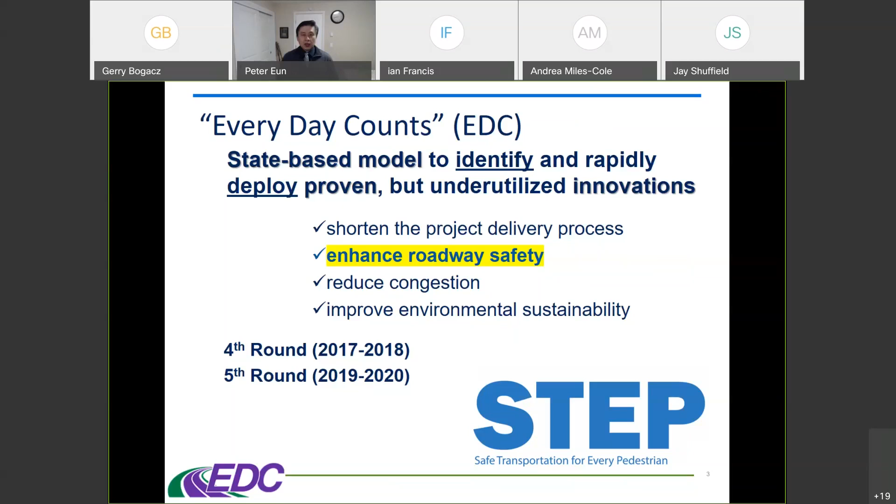There are several different categories, as you can see here, but obviously in my program, safety is number one and a priority. So let me get into STEP.

Why STEP? Well, over 72% of pedestrian fatalities occur at non-intersection locations, meaning mid-block. I suspect that if I asked everyone virtually how many hands would go up if people cross mid-block locations, even without a marked crosswalk, many hands would go up. 72% of pedestrian fatalities occur at these mid-block location crossings.

Not all of them are illegal. We think of jaywalking as being something that's illegal, but that's not always the case, and it depends. We do know that the majority of fatals and serious injuries happen when people are crossing the roadway. About 10 to maybe 12% nationally are walking-along-the-road crashes, but the majority are crossing.

So 72% are non-intersection, but roughly 27% of pedestrian fatalities occur at intersections, and about 16 to 17% of those are at uncontrolled locations, meaning no signals or stop signs.

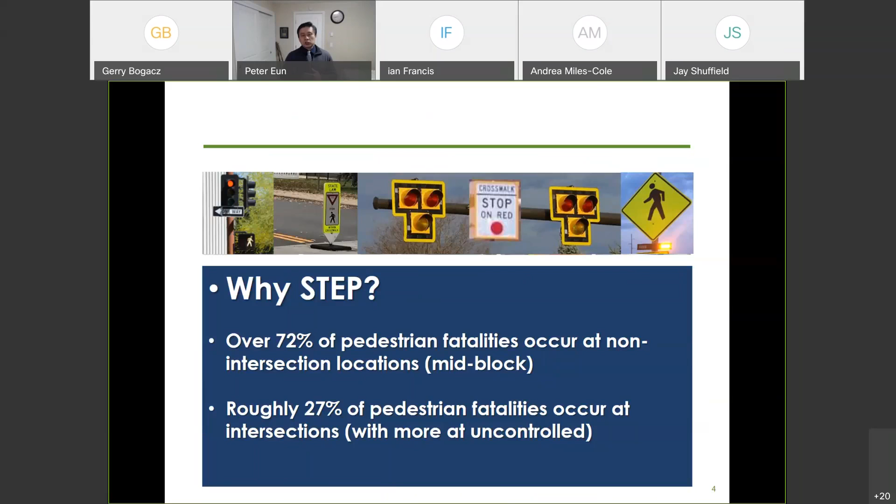Another thing before I get into the spectacular 7 is I want to talk about speed. New York is very well aware of the speed issue and how speed impacts pedestrians, but just a very quick review here with regards to the fact that the lower the speed, the less risk of death. 23 miles per hour is a 10% risk of death, while at 58, it's 90%.

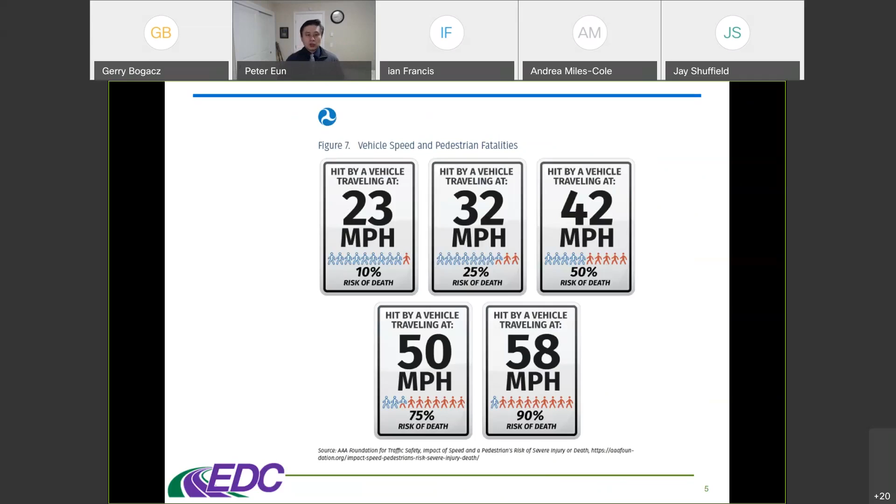And then at 42, it's 50%, that 50-50 point. So speed is something that all these treatments are going to have an effect on with regards to, and that's very important.

Now one thing, I don't know if you'll be able to hear this, if someone can let me know if you can hear the audio. What you're about to see will change your mind about speed. One vehicle traveling at a certain speed, the other at 65. Can you hear it? Yes, we can.

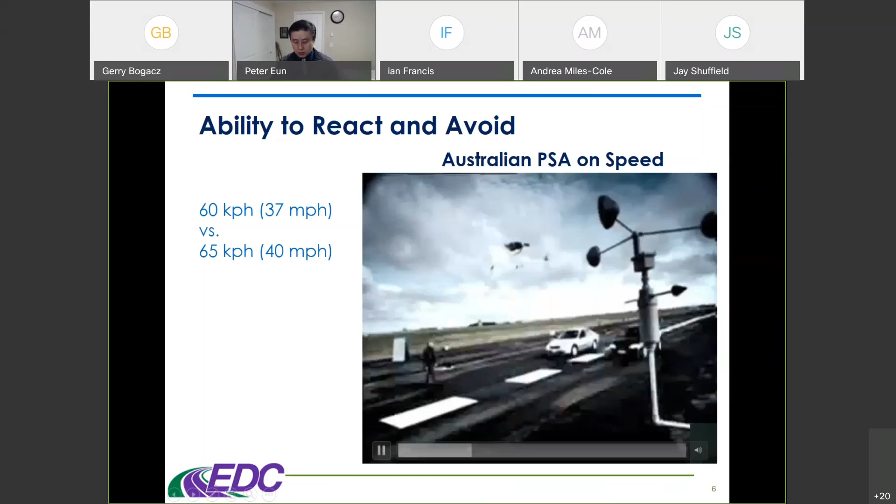Both drivers first react, and then a moment later they brake. And things start to get interesting. Out here the difference is extraordinary. In the last 5 meters of braking, wipe off half the speed. So this car is still doing 32 k's. This one also hits, but only at 5 k's. So no matter how good a driver you are, 5 k's difference up there makes 27 k's difference down here.

And imagine if this is the crosswalk with the pedestrian. So speed, it's just that 3 mile per hour difference that really makes that huge difference.

So, safe system is something that Federal Highways is going to be, you're going to hear a lot more from, and it's based upon the fact that everybody makes mistakes, there are going to be mistakes made, but we don't want those mistakes to be fatal type situations. Safe speeds is a very important part of the safe system.

And so with regards to STEP, that's going to affect that. Now, one other little bit of history before I get into the countermeasures is with regards to how this all started. There's a study back in 2005 called Safety Effects of Marked versus Unmarked Crosswalks at Uncontrolled Locations.

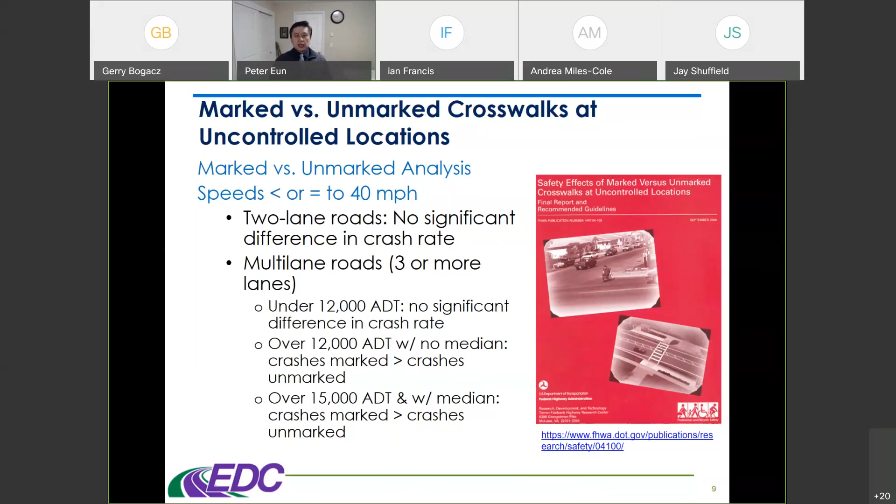So what does that mean? Should we not put marked crosswalks out there? Well, pedestrians are still going to cross at these locations because there are origins and destinations. People need to get places, and they're not going to walk miles out of their way to reach a controlled crossing. So this study said you need to do more than just a marked crosswalk.

In that 2005 study, there was a table showing the number of lanes, the ADT, and various speeds, indicating whether a location was a good candidate for a marked crosswalk or needed more treatment. The one thing it didn't include was the type of treatments to use.

What we did in 2018 was develop a guide for improving pedestrian safety at uncontrolled crossing locations, where we included the spectacular 6 different treatments matched to conditions. All of these treatments have their own sweet spot, and we helped identify where it's ideal to put in each one.

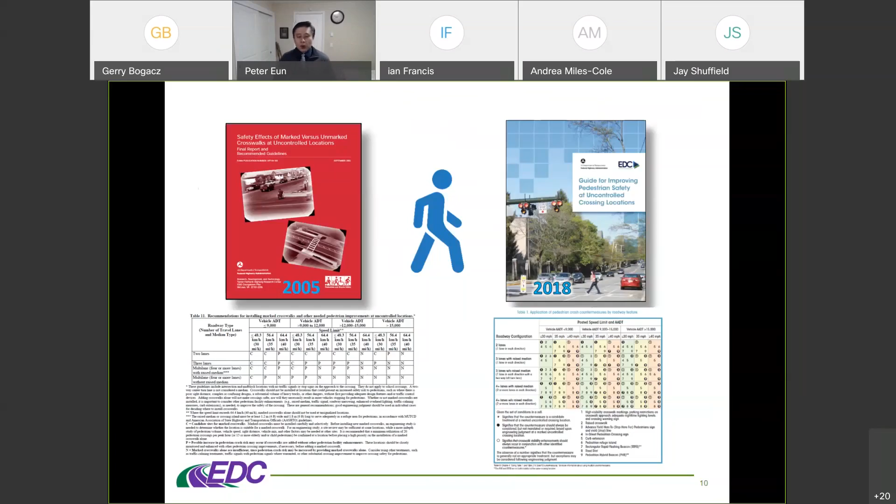Table 1 is something I'll come back to later, but let me go over the spectacular 7 — though only 6 of these are in this guide. The LPI, or leading pedestrian interval, which New York is likely very familiar with, is for signalized locations. This particular guide only deals with uncontrolled crossing locations.

Let me start with crosswalk visibility enhancement, which has a crash reduction factor of 23 to 48%. Crash reduction factors mean that if you don't currently have a treatment and you put it in, based on research reports and case studies, you can expect that range of reduction in crashes.

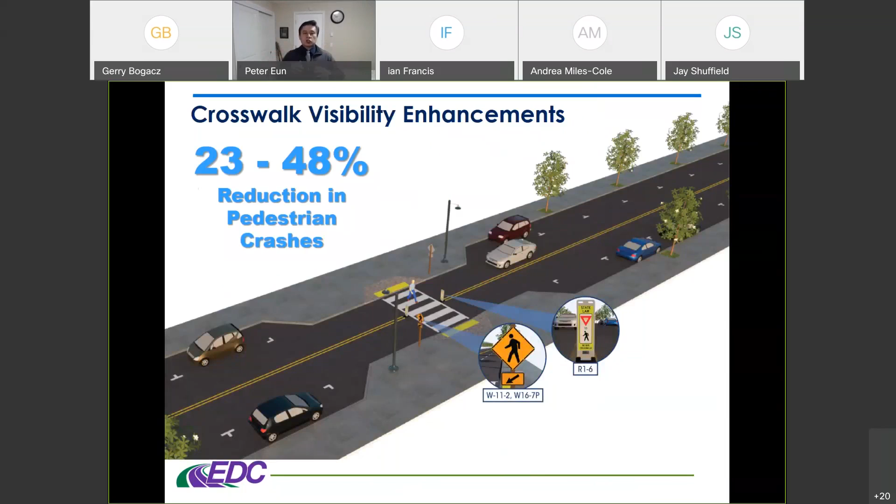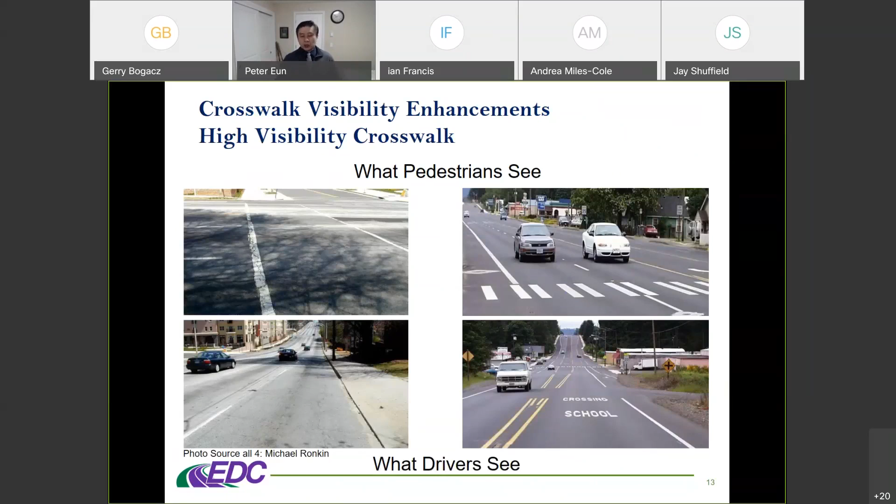Under crosswalk visibility enhancements, we have multiple categories. We start with simple, low-cost treatments any agency can do — instead of the minimum two transverse lines, going with a higher visibility marked crosswalk like a continental or offset continental. We can enhance those with different signing, like in-street signs or W11-2 signs, which many people are familiar with, and fluorescent yellow-green signage, which really draws attention and is specifically for pedestrians and cyclists.

We also have the advanced stop bar and the accompanying stop or yield sign. Depending on state law, you'd use a stop bar or a yield line, pulling it back ideally 30 feet — or 20 to 50 feet per the MUTCD (Manual on Uniform Traffic Control Devices). This increases the sight triangle, allowing pedestrians and drivers to see each other better.

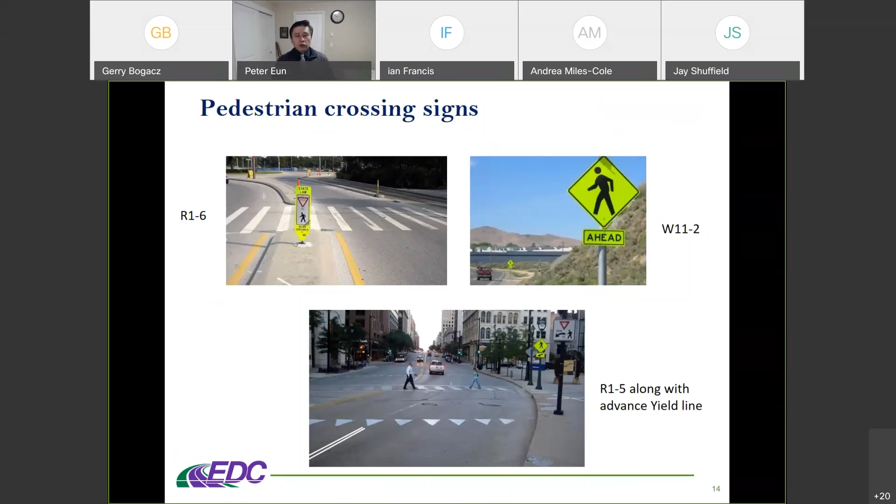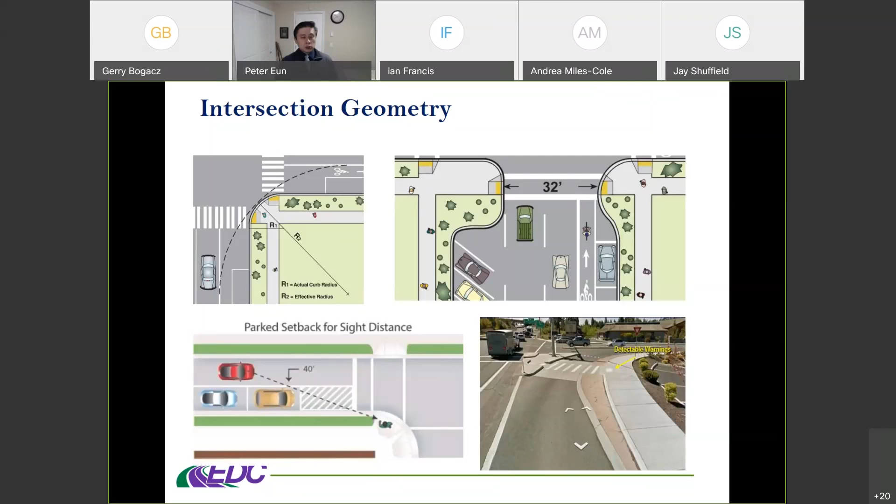So it allows trucks to go, but vehicles to make slow right turn speed turns.

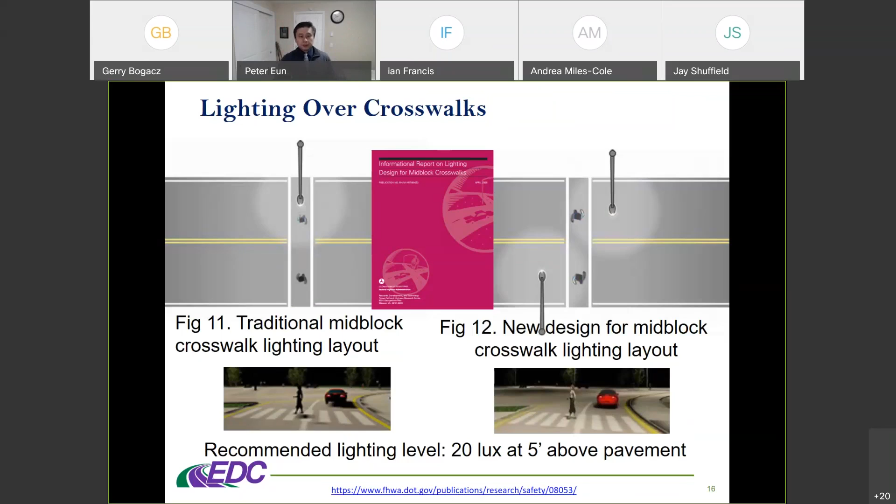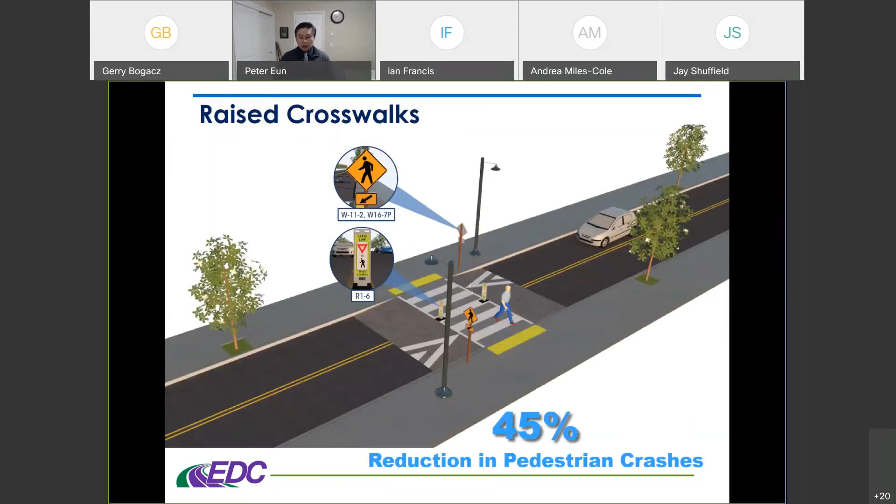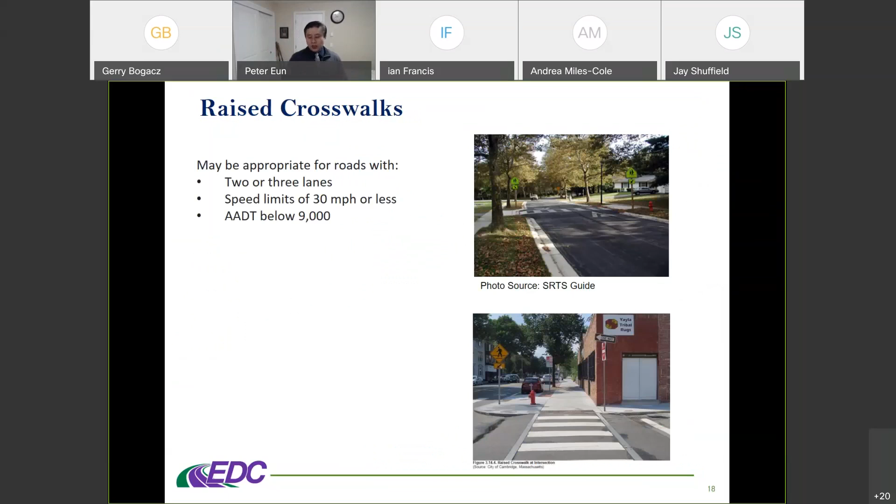Next, we're going to go into some traffic calming. The raised crosswalk, you're probably familiar with these as well. It's a form of vertical deflection rather than horizontal. There are a lot of different mechanisms out there, but we have a crash reduction factor of 45% for raised crosswalks. All of these treatments have their sweet spot, and here we've got 2 or 3 lane roads, speed limits of about 30 miles per hour or less, and AADTs, annual average daily traffic, below 9,000. So we're working our way up with regards to the lower cost treatments and the type of roads. You see a lot of times raised crosswalks on lower type residential roads, or maybe on lower speed arterials.

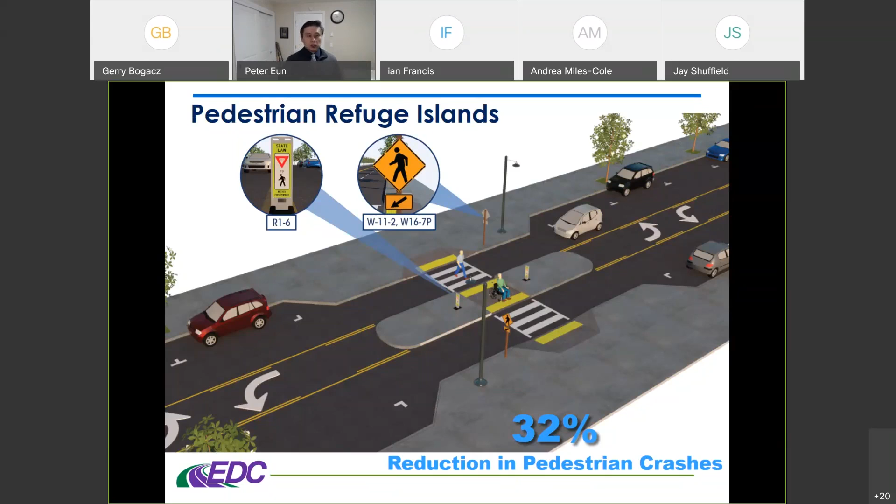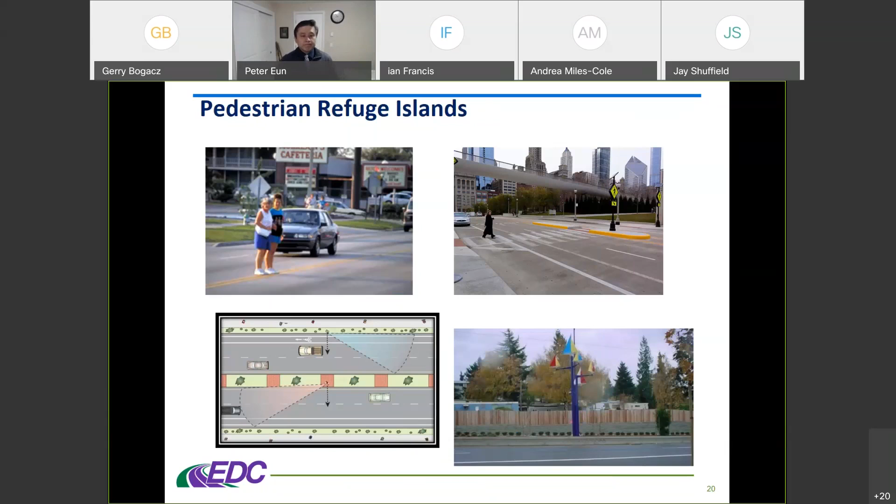Next, we go to the rectangular rapid flashing beacon, also known as the RRFB. As I said, the Spectacular 6, we use the Marvel Comics theme, since all superheroes, these treatments are super, but this one died and then came back to life. There was a patent lawsuit, but we're thankful that somebody brought it back to life and released the patent. These are very effective. Once again, these are in that sweet spot area of about 30 to 35 miles per hour, probably 4 lanes maximum. These are in interim approval - they're not quite yet in the MUTCD, but I believe in the next edition they will be.

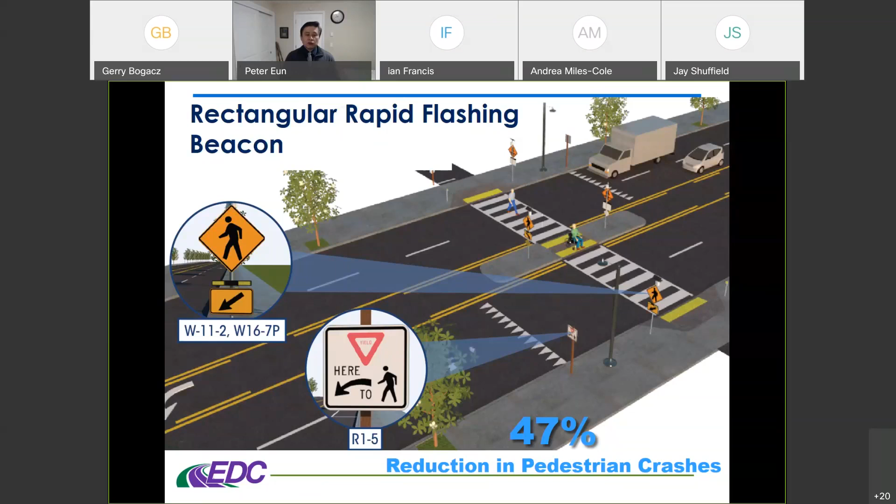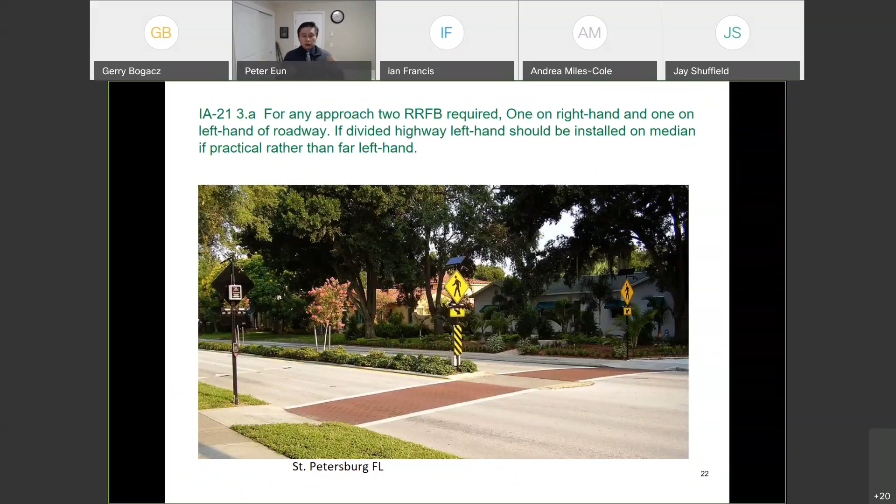But these are a conspicuity device, with a very bright LED flash rate that vehicles can see well in advance of the crosswalk, so they can slow down. Once again, maybe that 3 mile per hour difference to go from a fatal or serious injury to a minor crash or avoiding a crash altogether. Now, these do have various requirements in the interim approval, one being that they need to be on both sides of the roadway. So you have one on the right, and if you have a median, you can even have it in the median or on the far left. That's one of the requirements.

We do ask that you take a look at the interim approval. But at some point, you're going to get to multiple lanes, higher speeds, 40 miles per hour or maybe higher. The pedestrian hybrid beacon is really that next level we're going to. Now, the RRFB is around $12,000 for a pair to install, outside of other things you might need to put in like curb ramps. The pedestrian hybrid beacon gets a little bit higher in cost. There are some PHBs right now in Arizona that they're working on with solar and more compact units, and the prices are coming down.

But these are a little more on the higher end, but they are very effective with regards to helping pedestrians get across high-speed, multi-lane roadways.

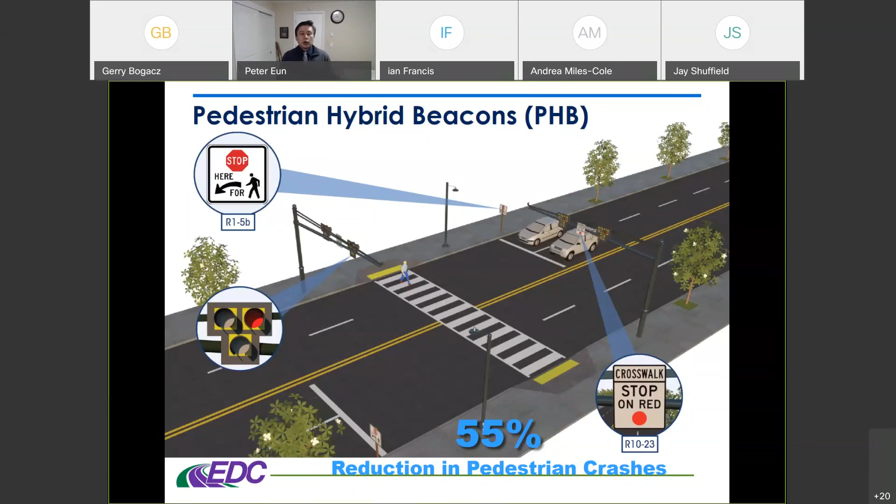If you can't meet the warrant for a pedestrian signal, which is like 93 pedestrians per hour—maybe in New York you get a lot of those, but in the rest of the country, not as often, and I'm sure even in some parts of New York 93 pedestrians per hour is hard to reach—with the pedestrian hybrid beacon, 20 pedestrians per hour is the guideline they give.

It's much easier to install, but really helps with getting pedestrians across those mid-block and even intersection locations. This is the sequence: it's blanked out, goes to flashing yellow, flat, then solid yellow, then solid red, and that's where the pedestrian gets the walk signal.

It goes to the wig-wag, where it starts the clearance interval. In that wig-wag is where a lot of people—or not a lot, I shouldn't say that—people can maybe not move forward. In a wig-wag situation, it's stop and go: stop, look for pedestrians, and then they can proceed.

So in many ways, the pedestrian hybrid beacon can be a great balance for traffic engineers, getting pedestrians safely across the roadway while still helping traffic progression. We really like these. Once again, at higher speed, multi-lane roadways, very effective.

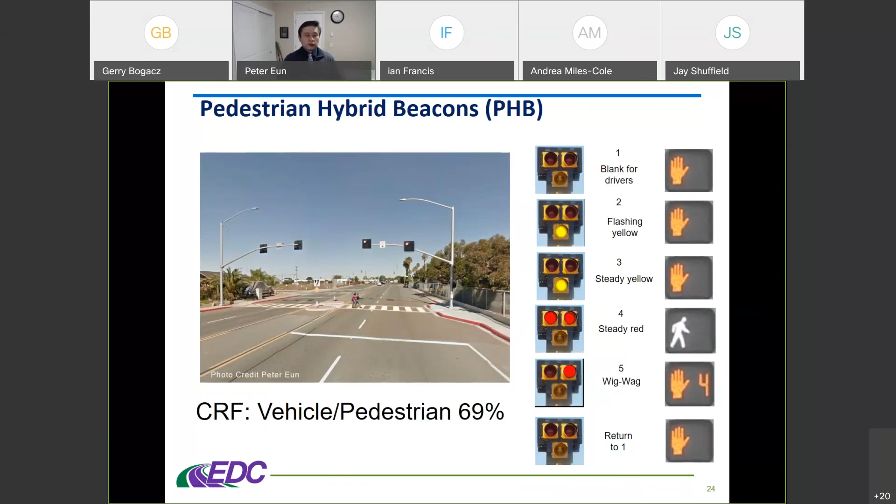And then road diets. New York has been very familiar with road diets, 19 to 47%. Other parts of the country call them road buffets because they like choices and not everyone likes diets. But either way, whatever you want to call them, they're effective.

The classic 4-to-3 road diet helps avoid that multi-threat situation where the first car stops and the second car maybe doesn't see the pedestrian. With one travel lane in each direction, the first car sets the speed, so it's a form of traffic calming.

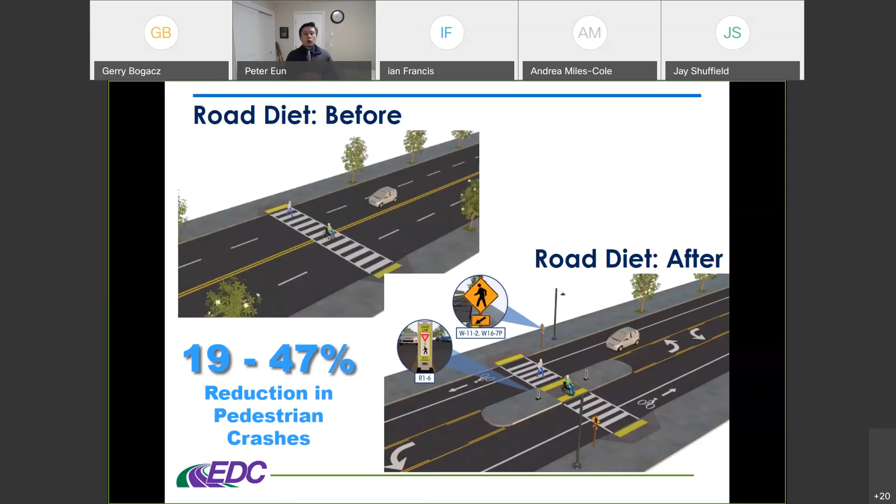It's great. Road diets are great for complete streets. A road is open 24/7, and you really want to design it for who the road users are for the entire day rather than just peak hour.

Here's an example in San Diego. I suspect you have a lot of great examples in New York as well, but this one I particularly like because New York does roundabouts. In this particular case, it was a road diet done with a series of roundabouts. It worked very well, and it also helps with business revitalization, which New York, I'm sure, has many stories about as well.

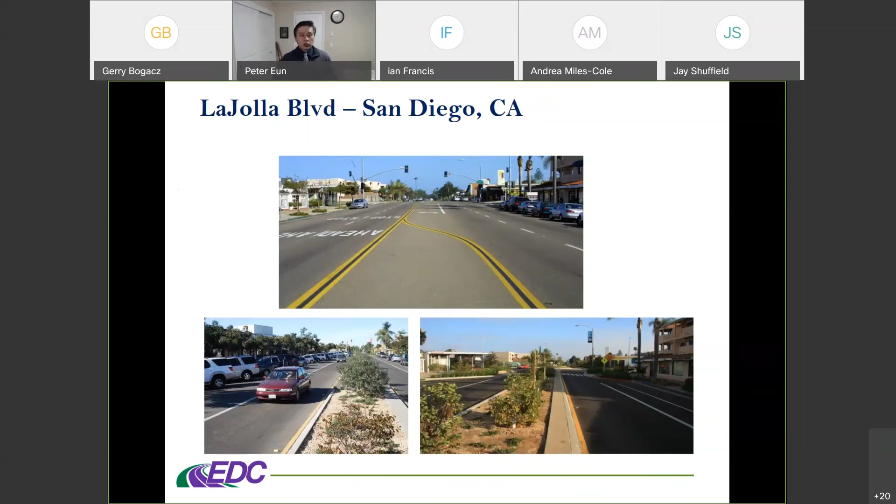So with that, that is the Spectacular 6. Those are the treatments that were in the guide for improving pedestrian safety at uncontrolled crossing locations. The guide shows a 6-step process which agencies can take to improve their pedestrian safety over time.

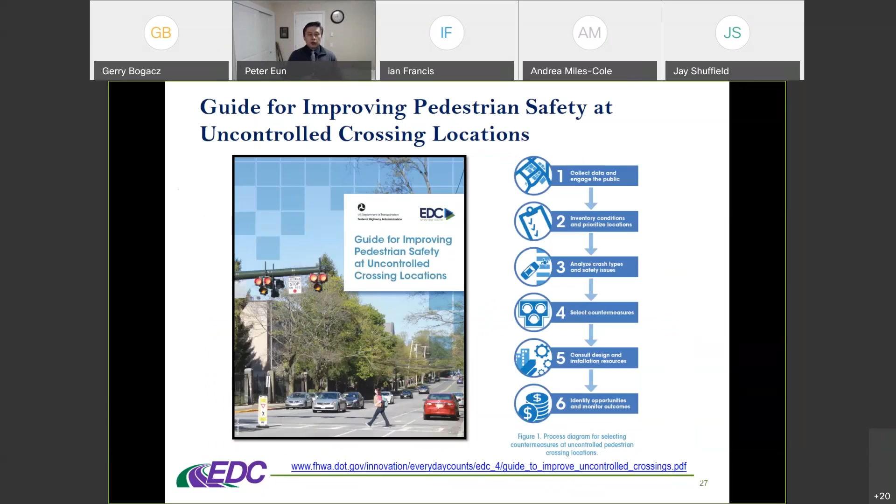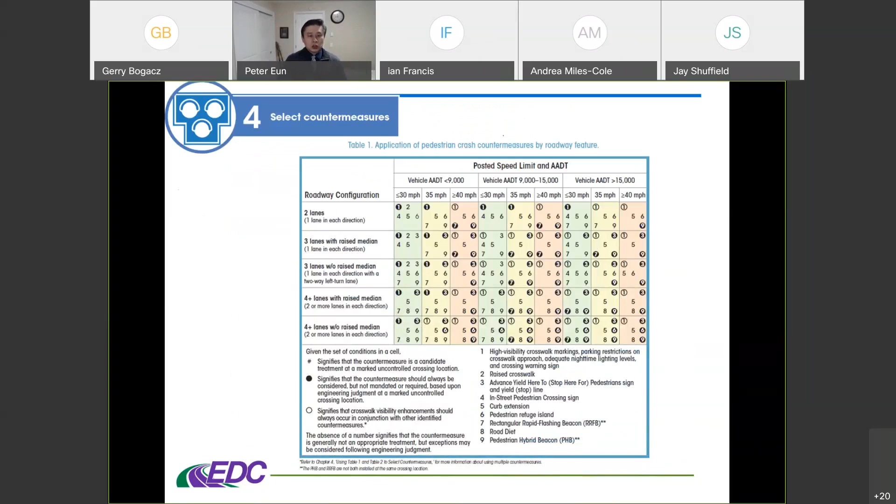I'm going to emphasize one area besides table 1, which shows the different treatments. Once again, these are all at 40 miles per hour or less. Anything above 40 miles per hour really needs to have more than just a marked crosswalk.

But step 2 in the guide says inventory conditions and prioritize locations. I'd emphasize, since this is the Metropolitan Transportation Council, that your different agencies should do a marked crosswalk inventory and compare those crosswalks to table 1 or something similar, so you know you're doing more in situations where you're not making it worse for pedestrians with just a marked crosswalk when you need to do more than that.

Over time, if you do that inventory and keep it consistent with this table, you're going to drive down fatalities, and overall make it a much better walking environment for pedestrians. It also helps with the liability of transportation agencies because you're using a consistent method for marking crosswalks. So I'll leave it with that.

As far as the Spectacular 6, our 7th one here, which is not in that guide, is the leading pedestrian interval: a 3 to 5 second head start, with a 13% crash reduction factor—although we are seeing some reports and case studies coming in where they're getting into the upper 40s, mid-50% range for crash reduction factors.

Very low cost, as long as you have the right type of hardware, like the APS, accessible pedestrian signals. It's just retiming things: a 3 to 5 second head start for pedestrians to get out and establish into the crosswalk, so right-turning and left-turning vehicles can see them and stop for them.

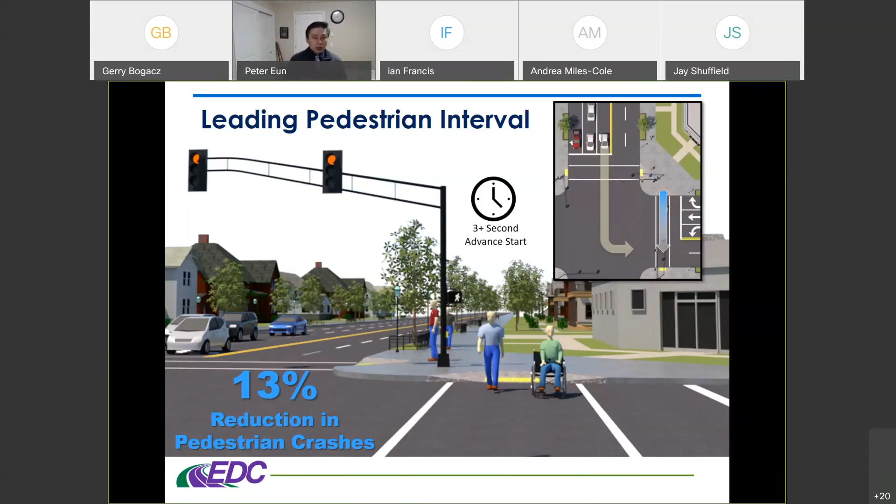So with that, once again, with the APS—especially for the blind and visually impaired—you need to have those APS so they know they can go ahead and start that 3 to 5 seconds before the vehicle moves. With that, I thank you, and remember to walk safe, but cross safer.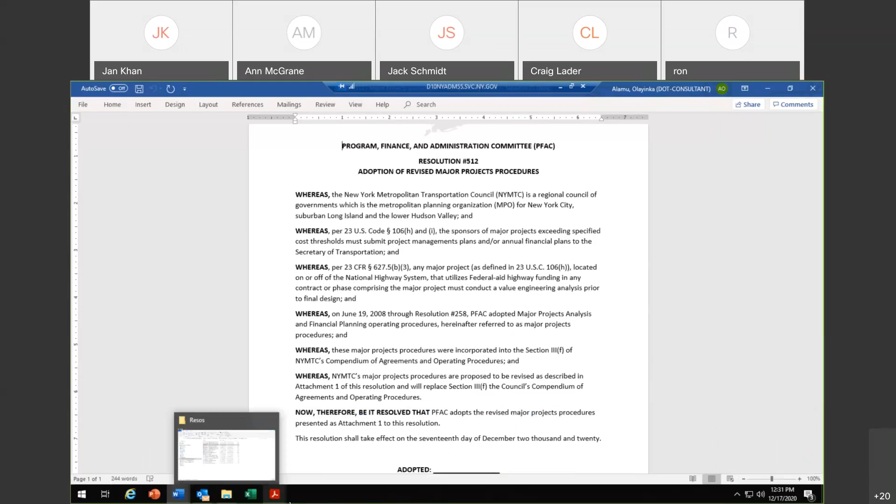May I have a motion to adopt Resolution 512? Motion, Nassau County. May I have a second? Second, Ann McGrane, New York City DOT. Is there any discussion?

Hearing none, we'll call the vote. Putnam County, aye. Rockland County, aye. Westchester, aye. Nassau, aye. Suffolk, aye. City DOT, aye. DCP, aye. MTA, aye. New York State DOT is an aye. Thank you all, the motion passes.

Next we're going to discuss or adopt Resolution 513, supporting safety performance targets under the Transportation Performance Requirements. Jan, would you please introduce the resolution? Sure, thank you, Chairman.

The Federal Transportation Performance regulations require that safety targets be adjusted annually, both by the state and the Metropolitan Planning Organization. To meet these requirements, the state adjusted its safety targets in August of 2020. NYMTC had 180 days to adjust its targets too. Prior to now, NYMTC members agreed to support the state's targets.